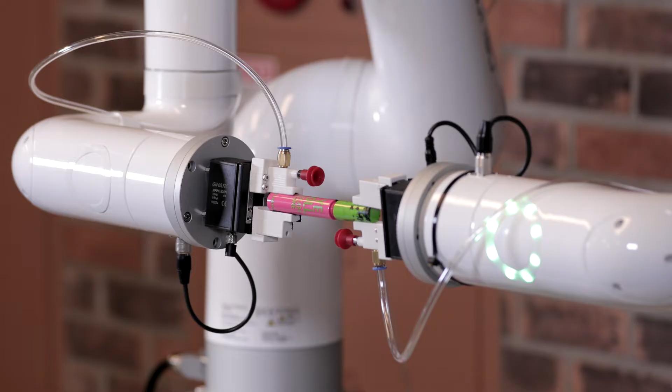To better understand the movements of the robot, let's start with moving the robot in beginner mode. We'll first move it to the home position.

In general, it's possible to move the robot in two different ways. This can either be done by sending commands to Conti or by using the direct teaching function, in which you can manipulate the robot arm yourself. You can use the commands over here.

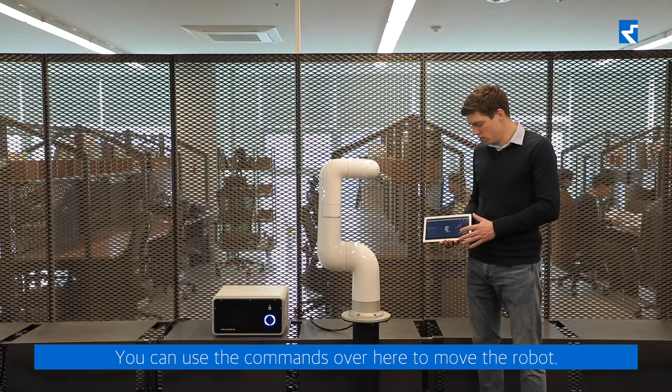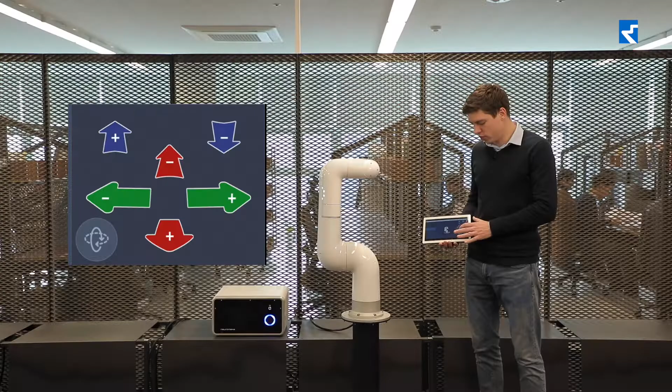We'll move the robot. For example, move the robot up or down. And left and right. We can also turn on direct teaching to be able to move the robot arm ourselves.

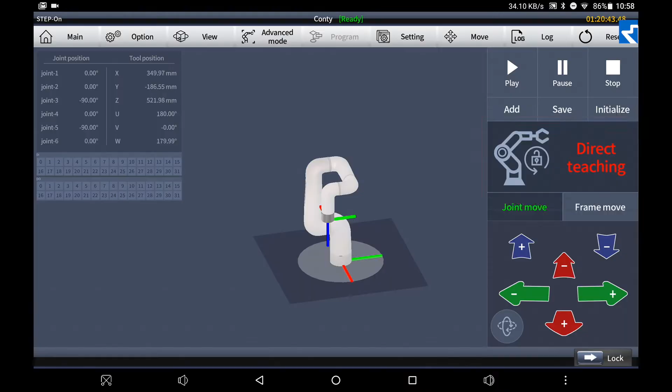Let's now make a simple program. The robot can either move in joint move or in frame move. With joint move, the robot will only look at its joint angles and calculate the easiest trajectory. With frame move, it will be able to move in straight lines, like up or down or left and right, like I just showed you.

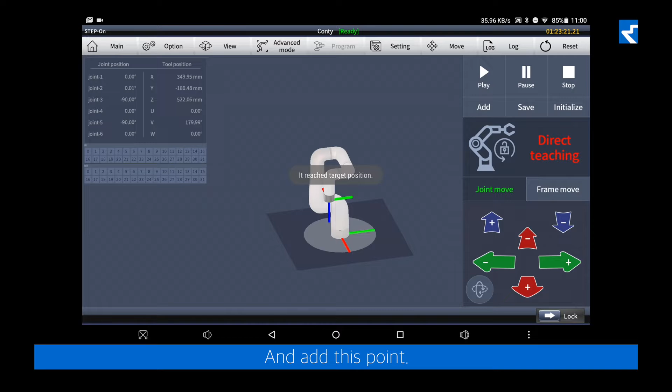Let's start by making a joint move program. First, I will make the robot move home again. And add this point. Turn on direct teaching and move the robot a little bit. Add this point, turn off direct teaching and we can play our program.

As you can see, it just turns its joints to move from position 1 to position 2.

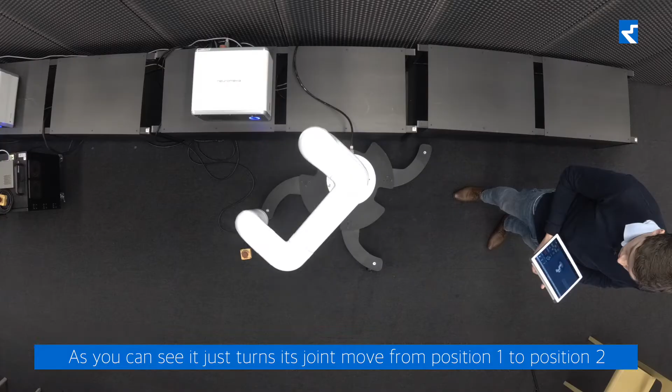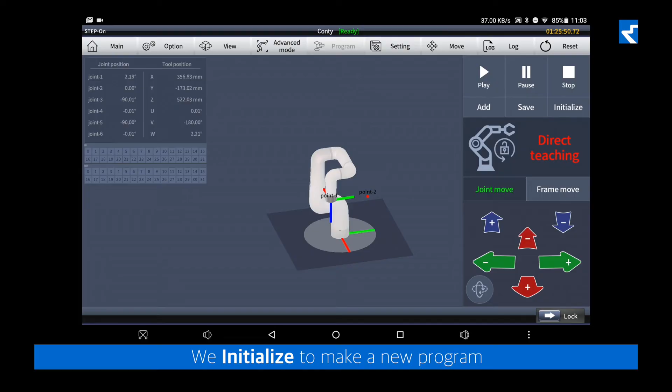Let's now try this with frame move. We initialize to make a new program, turn on frame move, add the current point, and move the robot a little again. When we now press play, you can see that it will try to make a straight movement between the points.

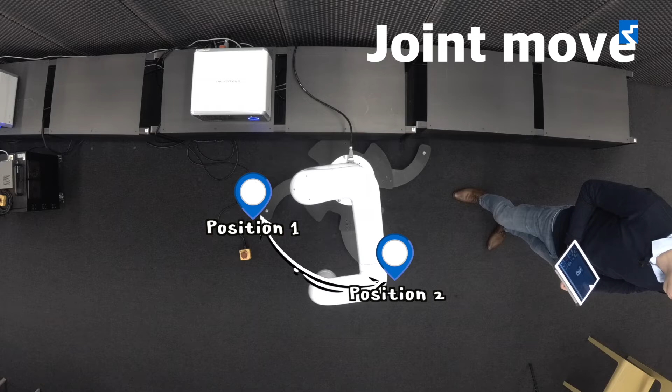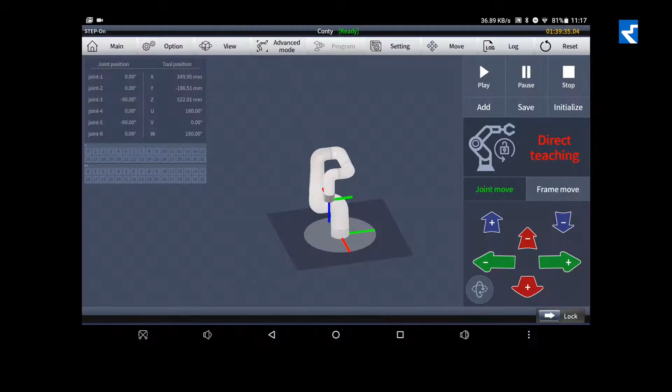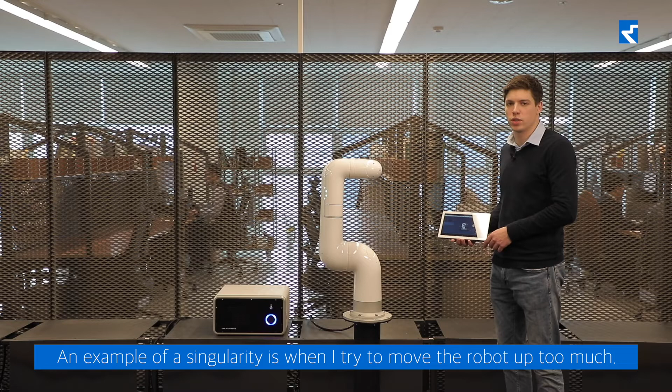For moving the robot, it's advised to use joint movements over frame movements. With frame movements, it's possible to cause robot singularity, which means the robot can't make the movement because either it's outside of the workspace, one of the joints has reached its maximum orientation, or the movement would exceed the motor limits. An example of a singularity is when I try to move the robot up too much. The joint limit will be reached and I get an error.

You can always reset the robot to continue working. It's always advised to move to either the home or zero position because you know that the robot will definitely be able to go to this position.

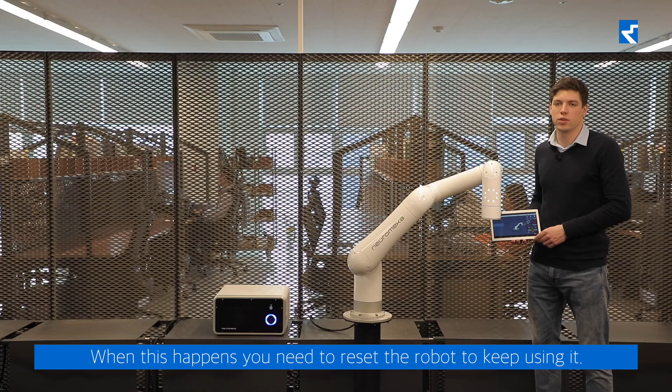Another singularity will occur if I move the robot too far to the left. It will reach its joint limit and the LED will turn red, meaning a safety feature has been activated, like this. When this happens, you need to reset the robot to keep using it. After that, it's advised to move to a position you know the robot can make for sure, like the predefined home position.

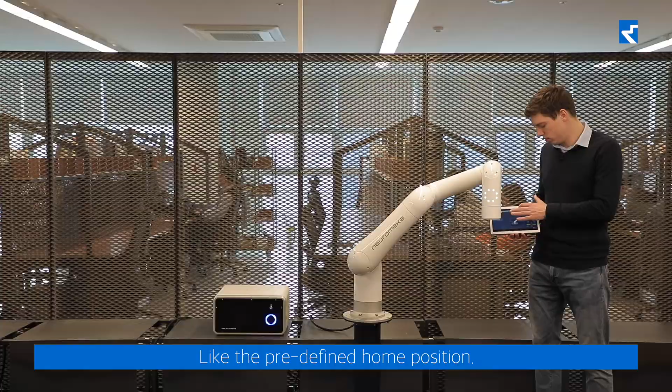In this video, I taught you how to use the robot in beginner mode. In the next videos, I will talk about how to make more advanced programs.